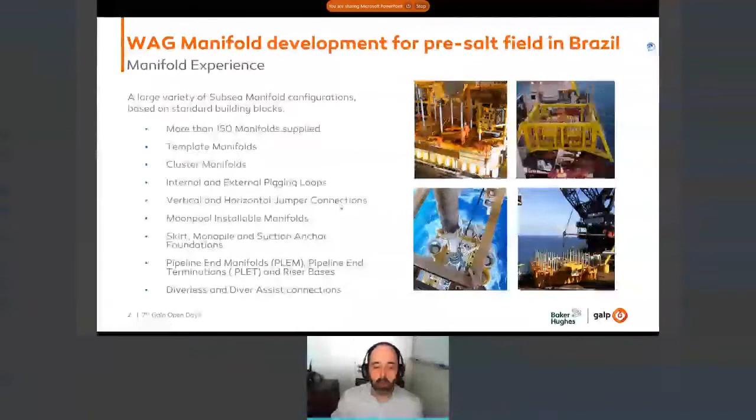We have a large variety of subsea manifold configurations on standard building blocks, more than 150 manifolds supplied. We also have template manifolds, cluster manifolds, internal and external pigging loops, vertical and horizontal jumper connections, moonpool installable manifolds, skirt, monopile and suction anchor foundations, pipeline end manifolds, PLEM, pipeline end terminations with acronym PLET, and riser bases. We also have diverless and diver-assisted connections. Here is a collection of pictures where you can see some of the examples I just mentioned.

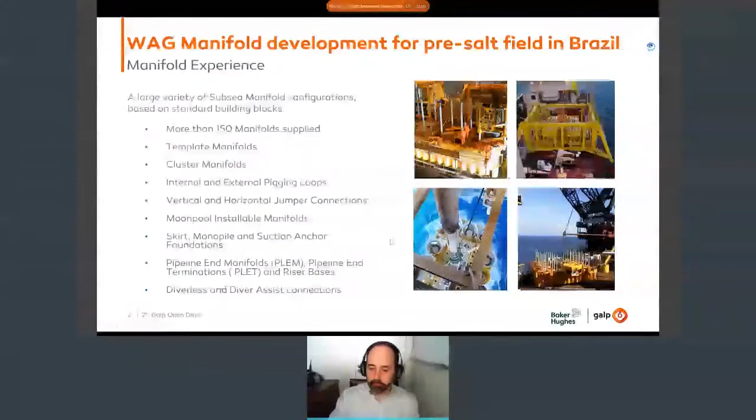So now let's go to the WAG manifold itself - the project overview. In 2014, Baker Hughes started the engineering phases of the WAG manifold for water or gas injection for the pre-salt fields in Brazil. Just a note to clarify: WAG means water alternated gas, so basically we can inject water or gas into the field, the formation.

Here is a 3D model of our manifold. As you can see, we have basically 4 VCMs to connect the manifold to the well, to the Christmas tree, and also 2 VCMs to connect the manifold to the platform. This manifold has a singularity where the design is based on modules, so we have a modularization here. I will explain that in detail after, okay?

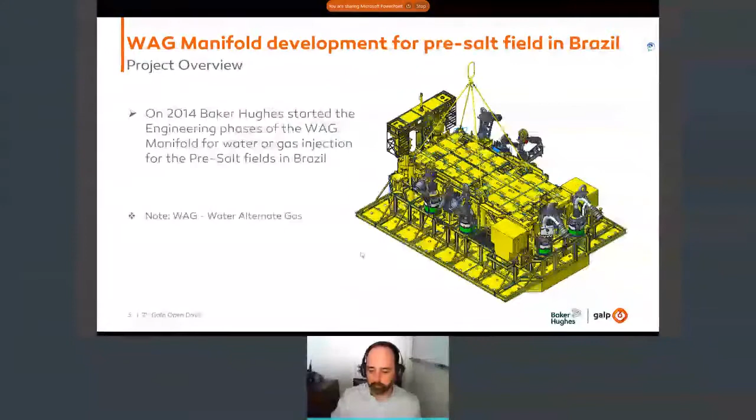Just to give an idea, I will present the input data now. The water depth for this project was 2,500 meters. Working pressure, 10,000 psi. The pipe ID is 4 1/16 inches for the header, 5 1/8 inches for the branch. The material trim is HH, corrosion-resistant alloy. The hydraulic pressure, since this is an ultra water depth project, is 4 to 5,000 psi. The design temperature is from 2 up to 70 Celsius degrees, and the design life is 30 years.

Let me change the pointer to make it clear. Better now, right? So, the design characteristics: the dimension of this manifold is about 16 by 8.5 by 4 meters for transportation - that's something I will also explain after - and 16 by 13 by 7 meters for installation. The weight: average weight is 150 tons for transportation, 215 tons for installation, and 280 tons for operation. Those are approximate dimensions.

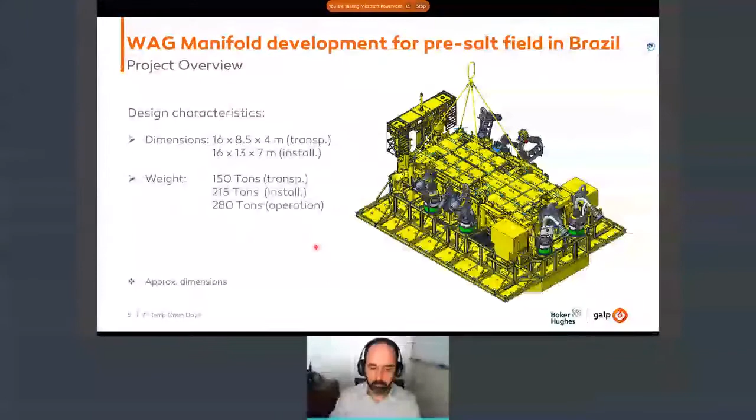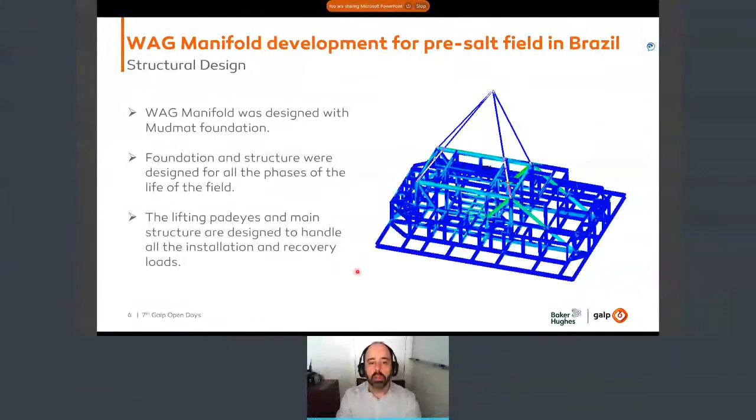Structural design: the WAG manifold was designed with a mud mat foundation. The foundation and structure were designed for all the phases of the life of the field. The lifting padeyes and main structure are designed to handle all the installation and recovery loads. As you can see in this projection, the structure handles installation loads and also recovery. So the installation has a very robust design - it will not handle only the weight of the manifold itself, but also the extra loads when the manifold is installed and craved on the ground, so it can be uninstalled and recovered.

Pipeline design. The pipeline was designed in compliance with ASME B31.8. The pipeline material is X65 with Inconel overlay to comply with trim HH. Use of ASME curves on the branches.

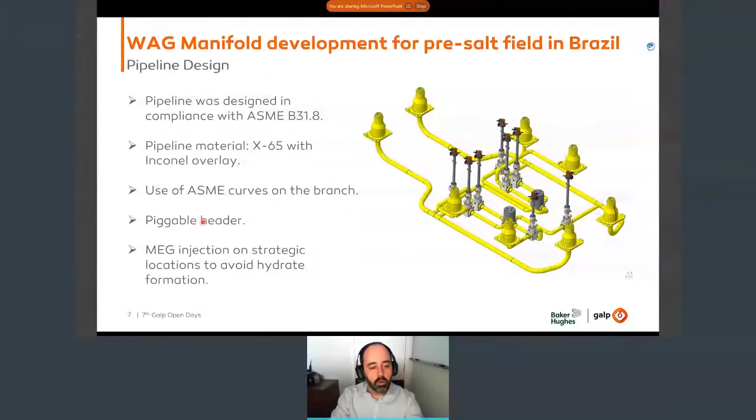It maximizes our speed to delivery. Piggable header and MEG injection on strategic locations to avoid hydrate formation.

Here in this picture, we have a 3D projection of the pipeline. You can see we have a dual header, and this header is piggable. To connect the two headers and make a pipe loop formation, we have a crossover module installed here to connect these two hubs.

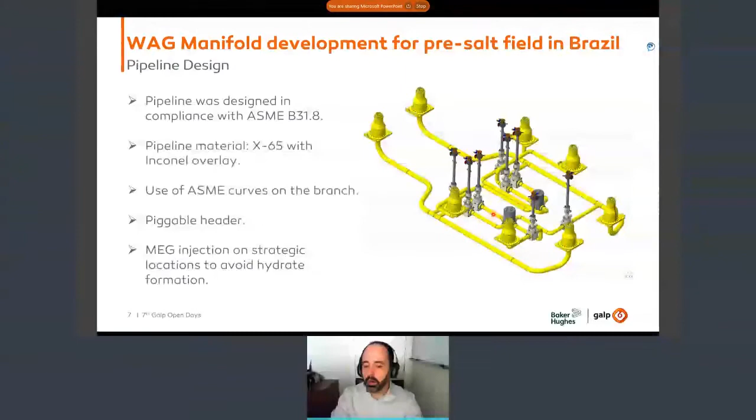I will show this in detail as well. Here you can see these two hubs connect the manifold to the platform, and these four hubs here connect the manifold to the well. We have some manual override valves, and the choke modules are connected by a collet connector.

Modularization. Now let's get into details of these modules. The manifold has basically two choke modules and one crossover module. Let me go into detail.

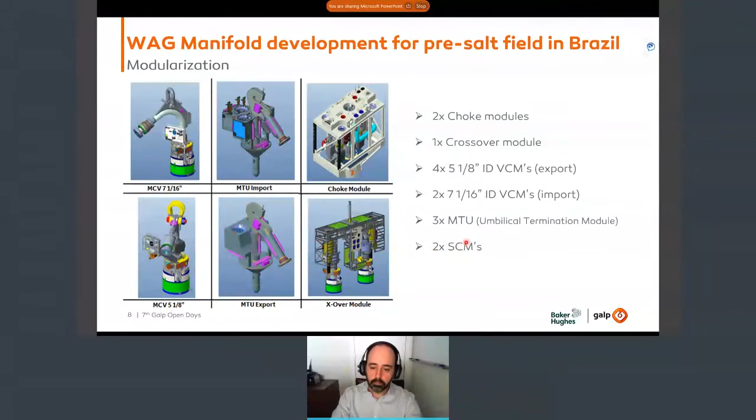Main challenges for engineering. We returned to the manifold product line in Brazil after 10 years, so the team is quite new, and we have a technical challenge to update and adapt the global standard products for the specific requirements for the pre-salt in Brazil.

The creation of the new manifold team in Brazil brought the challenge of a learning curve, and the need to adapt to the company's technologies, culture, and requirements.

We also have a huge challenge here on transportation. The construction yard here in Brazil is far from the coast, and the manifold itself is a large equipment, so we have a road transportation model involved. The roads here in Brazil have this limitation: 4.6 meter height and 9.0 meters width.

So basically, if we go to our installation module of the manifold, the dimensions will be over these limits. What we did here is basically remove the side skirts of the mud mat and also the sub base. So this is the configuration for the manifold for transportation.

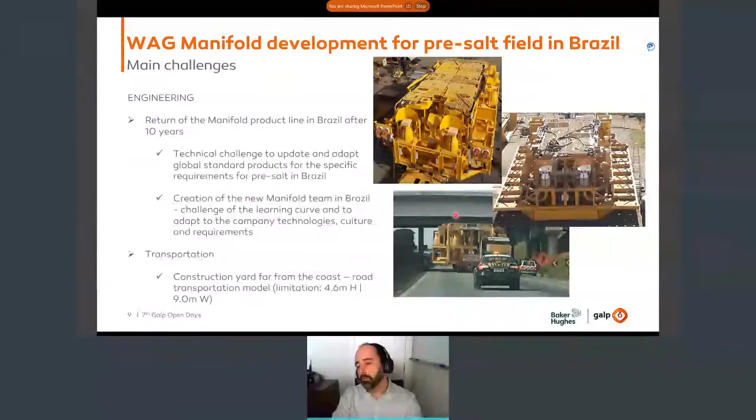Next challenge was regarding project management. During the project execution, we needed to have a construction yard development, and also we have an unprecedented execution model in Brazil. The manifold was completely executed and tested on the construction yard.

This was a successful model where basically we brought the 3D model and just delivered the 3D module to the construction yard, and they were responsible to take this 3D module and elaborate all the executive design to construct the manifold itself. It minimizes the loss and speeds up the process, and we were able to deliver on time.

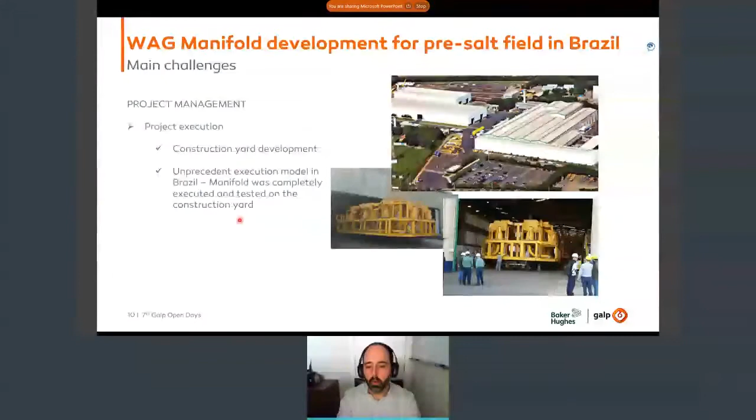So after all, we had our first installation in November 2018. The distance from coast is 200 kilometers, and the water depth for this first installation is 2,000 meters.

Up to now, we have 4 of those WAG manifolds installed. The installation was a success - we didn't have any issues during the installation. Up to now, we have 1 manifold completely commissioned with all the VCMs and all the modules installed, and it was a success.

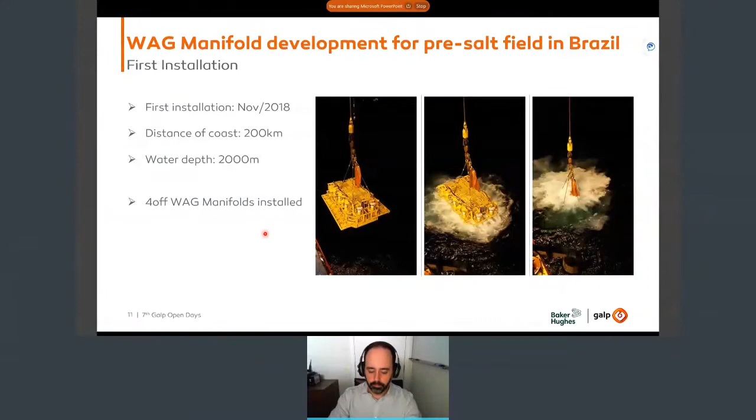And that's it. Let's go for the Q&A.

Yes, great. Well, good morning, good afternoon everyone. I would like to thank Galp for this opportunity. It's really good to get a chance to show you a bit about our program, called the modular compact pump, which is a completely different way of doing subsea boosting in general. This is a program we have in our company targeting the qualification of this pump.

But I would like to start talking about the challenges. When we think about our industry challenges and subsea development, we tend to think about large and complex subsea infrastructures laying on the seabed, and these have a huge demand on the topside facility in terms of equipment and footprint. Subsea boosting has been a response to those challenges, starting from improvements on the process side, but also looking after cost reduction and footprint reduction requirements from the topside facility. But nowadays and in the future, this goes beyond the cost saving requirement.

We are now discussing and talking, and the operators are talking about emissions - how we can reduce emissions and reduce the CO2 footprint of equipment in general, from conception all the way to the end of their operation. And then we use every single opportunity, whether size reduction or weight reduction of equipment, not only to reduce cost, but also to reduce that footprint or emissions in general coming from the conception of this equipment.

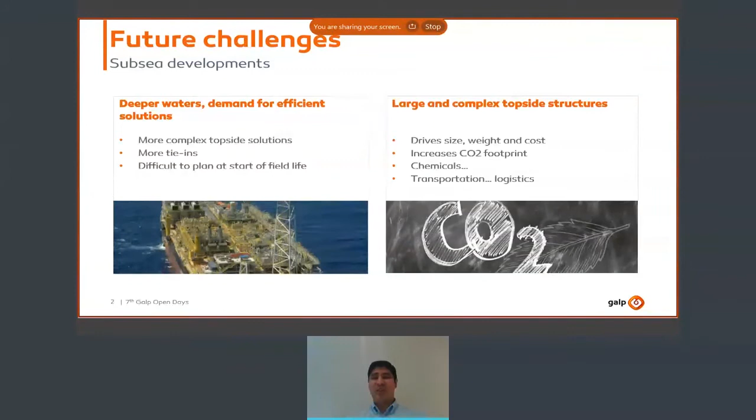But this creates some additional demands. As you have two sides, you need what is called a barrier fluid system, which is basically having fluid inside the motor to avoid process fluid going inside and damaging it. But this barrier fluid system has an additional requirement which goes together with a complex subsea umbilical. This umbilical goes all the way to the top on the platform or FPSO, and it has an additional demand on footprint and weight capacity, hosting the HPU and a sophisticated control module for that.

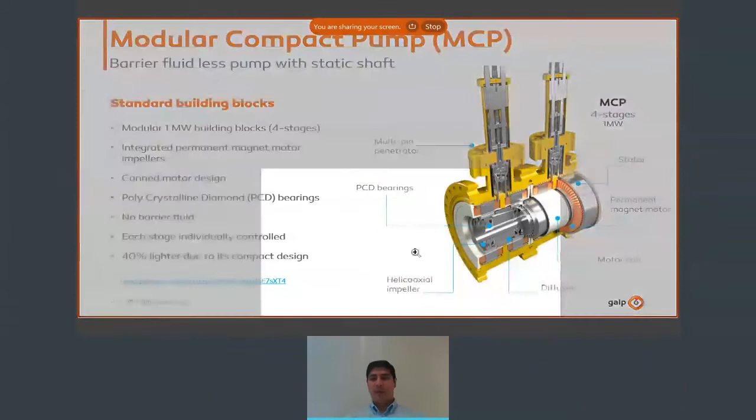The fluid in this configuration comes from the left. As I said, the shaft is not rotating, and the fluid basically wets everything between the shaft and this white barrier, which we call the ceramic can of the motor. So therefore, all the bearings and the impeller, and even the rotor part of the electric motor, is wetted by the process fluid.

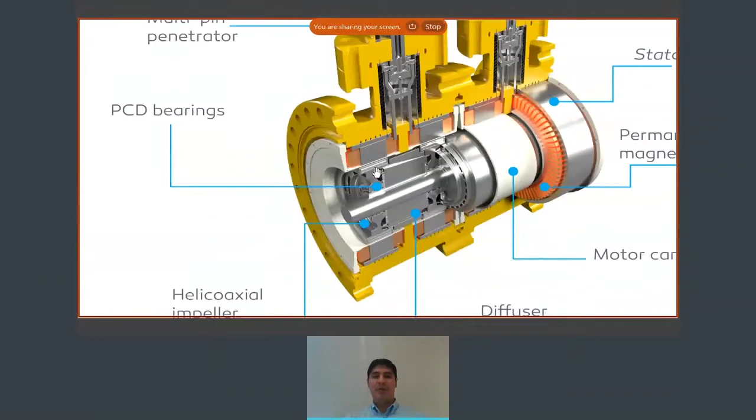This way, you basically avoid the need of a barrier fluid. That process fluid then, after going through the helicoaxial impeller, this configuration here, it's a helicoaxial impeller for multi-phase application, goes into the diffuser and then into the next stage of the pump. On the outer side you have the ceramic can and the stator part of the motor, so then we have an integrated rotor part of the motor with the impeller, and that way we avoid the need of a barrier fluid.

So this has massive advantages. One of them is 40% lighter due to its compact design, because of this integration of impeller with the rotor part of the motor. Also, you have smaller loads on the bearings, as you actually have individually controlled stages, having dedicated motors for each of them. So then you have high flexibility in controlling the RPM of each impeller, which is a big advantage, especially in multi-phase applications. This is the concept and the benefits that the modular compact pump brings.

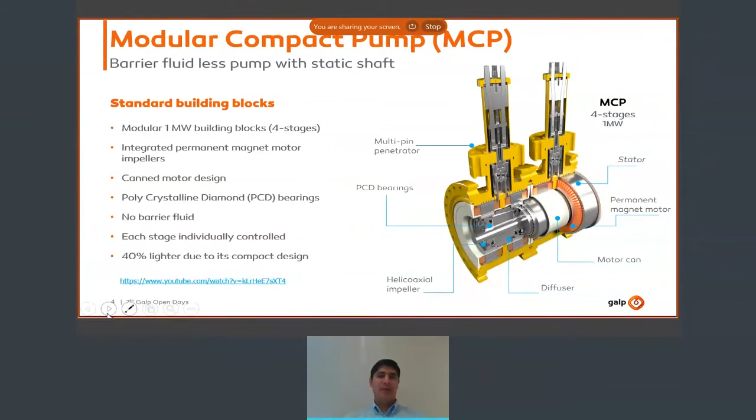So talking about advantages, this concept is fully scalable. We are talking about replicating, or the option to replicate the stages as we wish to meet differential pressure or power requirement. So therefore you have really no limitation on number of stages, which in the case of conventional pump you have due to the rotating shaft and the loads on the shaft.

On top of that, we can adapt, because of this, to changes along the life of the field. So this inherent capacity of adding stages also brings an additional big benefit, which we call inherent redundancy. As you can replicate many stages, and as they are individually controlled, you can actually survive and continue operation of the pump with one failure or a couple of failures. You just compensate the RPM of the other stages, or increase the RPM to compensate for the lack of one stage. So if you compare that with a conventional pump, with a single failure, you will lose completely a conventional pump. While in this case, you can actually have extra redundancy.

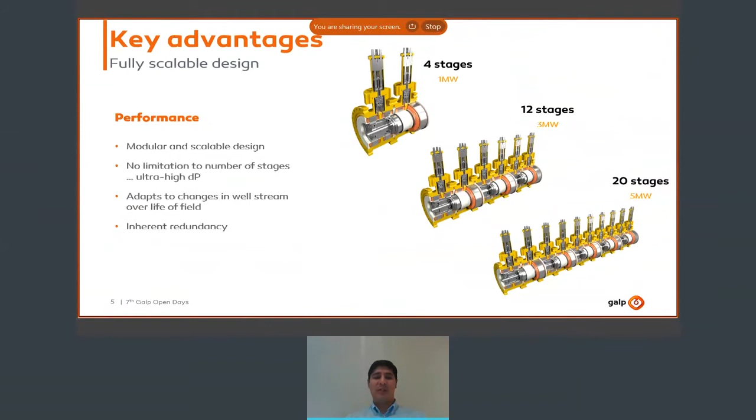An additional benefit of this scalability is that if we're talking about an application where, for example, you have a 3 megawatt pump available and you need 4 megawatt power, you will need to use 2 pumps to meet that capacity demand. While with this concept, you just add a couple of more impellers, and then you meet what you need. So that is also an important cost saving from that perspective.

An additional benefit, as I said, is linked to the elimination of the barrier fluid system. So here on the right side, you see the top side footprint demand from the MCP pump, while for the conventional pump, you will need double that capacity, basically or mainly due to the barrier fluid system. So of course, as you don't have a barrier fluid system, you will also have a simplified umbilical, and that's aligned with all electric systems, which are the new trend in the subsea space.

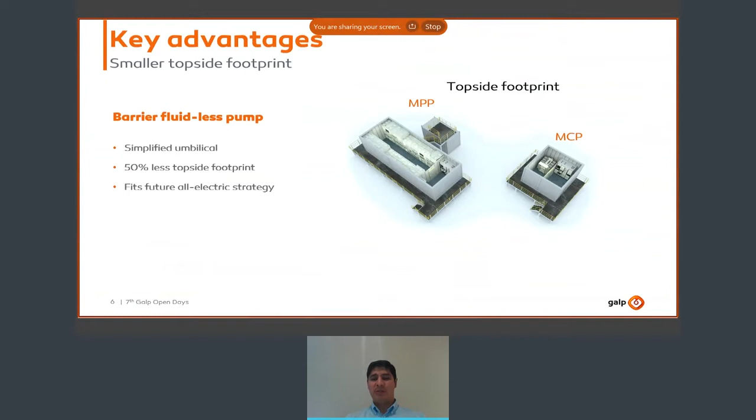So cost reduction, I mean, all these benefits bring cost reduction. An estimate is around 25% lower cost in general. Again, this comes from different sources. One of them is the barrier fluid elimination, which at the same time brings the simplification of the umbilical that I referred. So on the right side, you see the modular compact pump power cable, and on the left side, you see the conventional pump cable that you would need.

And imagine this from the emissions and CO2 footprint perspective. Just thinking about transportation and fabrication of a cable in bigger reels and bigger vessels potentially. So it does bring a big advantage also from the CO2 reduction, emissions reduction perspective.

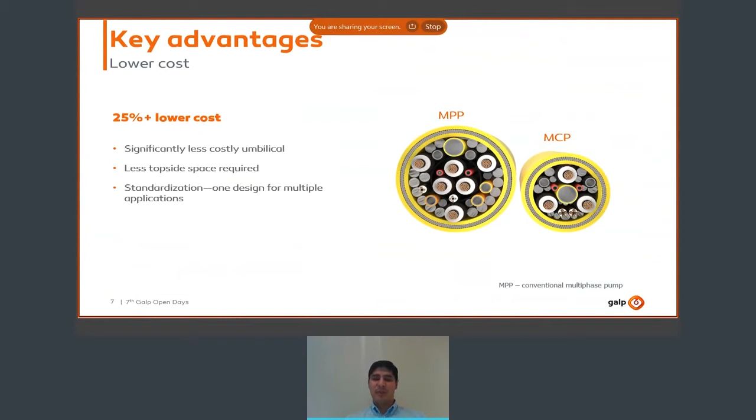So a bit on the system design. A dual boosting station with the MCP would look more or less like in the picture. On the bottom right side, you have the power cable, which feeds first a transformer. This transformer feeds power to the VSDs through wet mate connectors, and at the same time, these VSDs control and feed power to individual motors on the modular compact pump, which is in white here. And of course, this comes into modules, and you have piping manifold, which is conventional in this kind of stations.

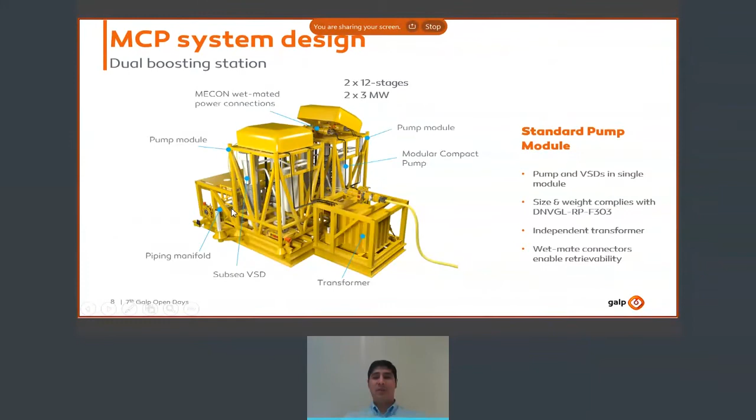So I told you a bit on the technology and the benefits it brings, and this has been a development that's been on for a few years now, but has focused so far on the multi-phase version. So thinking about the multi-phase version, we are talking about helicoaxial impellers and not centrifugal impellers. And on the path we have been going through, it is in 3 phases.

Phase 1 was back in 2016-17 and it's been completed. So at that time we built and tested a prototype, and this was in our facility in Bari, and we tested this pump up to 5,000 RPM and 80% gas volume fraction. So this proved to be a successful testing, where among other things we actually verified that the polycrystalline diamond bearings can operate with this process fluid around for cooling purposes. So an additional important learning was that we can really operate this pump with a failed stage by compensating or increasing the RPM of the other stages. So that's back to the inherent redundancy that I mentioned to you.

Then phase 2, which has also been completed, was about critical components and sub-assembly testing. So here we did process fluid lubricated bearings testing. We actually went beyond 6,000 hours of testing of these bearings, which was a good learning and demonstrated the feasibility of this concept. So we also designed the motor and power electronics, and we designed a pilot for the qualification in the current phase, which is phase 3.

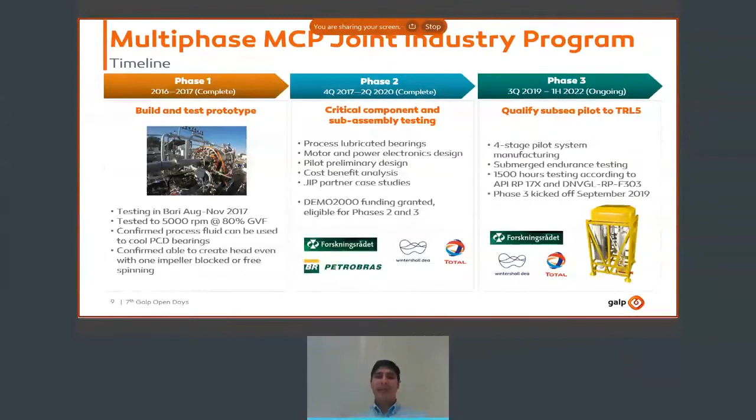That's on the multi-phase pump program, and we do see this technology as a platform for other applications. The next step would be to have this centrifugal pump, or what we are developing as a helicoaxial pump, for a single phase application.

That basically targets possibly two main applications: water injection to increase oil recovery, and CO2 reinjection. In the case of CO2 reinjection, as this is a pump, it will be for CO2 in supercritical conditions, which is a more liquid-like type of fluid. But what we can make use of is the multi-phase program and the qualification program we're completing.

So it's actually quite a bit. We will be using, for a single phase application, quite a few components, including the multi-pin penetrator. We will be using the motor part, the stator, permanent magnet motors, the motor can. So all that will be qualified and available for a single phase application.

And also the bearings. So the bearings, due to the different geometry of the centrifugal impeller, will need to be slightly different in size and arrangement. Also the diffusers will need to change, as the diffusers are in this case applicable for helicoaxial and multi-phase applications.

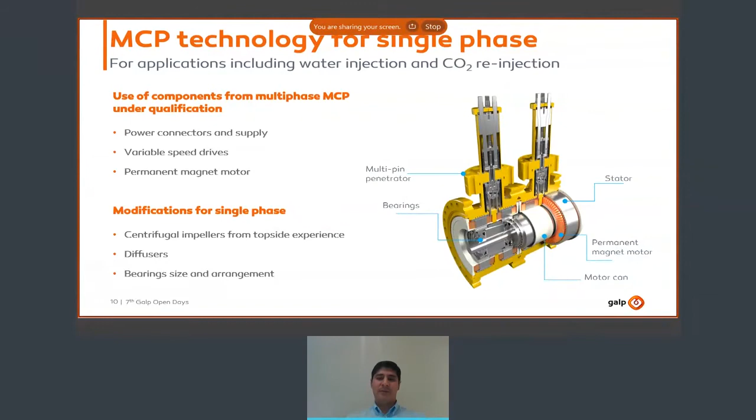But so then basically I'm telling you we're missing the hydraulic part on the design of the centrifugal impellers, and that's actually something we have done quite a bit, specifically in topside solutions. So we have provided pumps with differential pressures of up to 540 bars, for example, for CO2 applications. So we really know that application well, with proprietary design and in-house expertise.

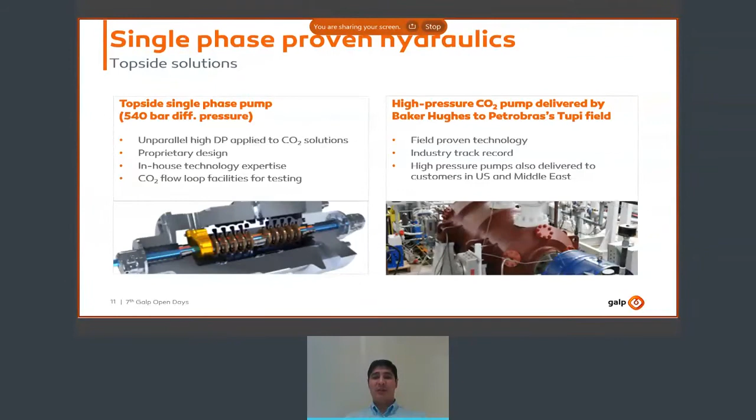And this type of pumps, again with pretty high DPs, are being delivered, like for fields like Tupi with Petrobras, and others in the Middle East and the US for both CO2 and seawater reinjection. So implementing these hydraulics into the previous concept will basically fill in the gaps.

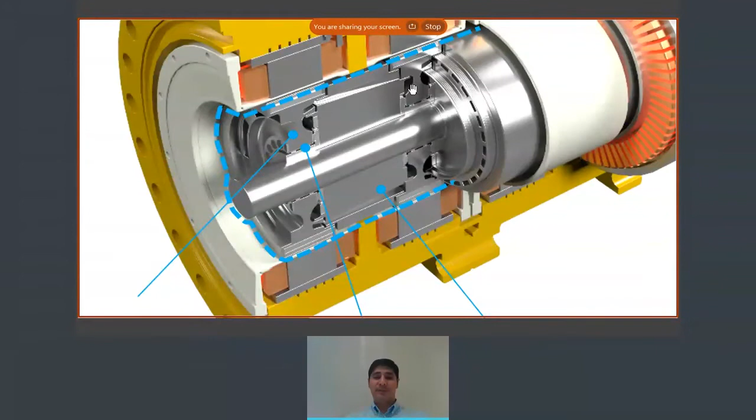You can see here the thrust bearings, the synthetic diamond bearings that will need to change a bit due to the new geometry of the centrifugal impeller, also the diffuser as an example, but the rest will continue being the same. So that brings a lot of simplicity or a lot of lower complexity for this potential new development.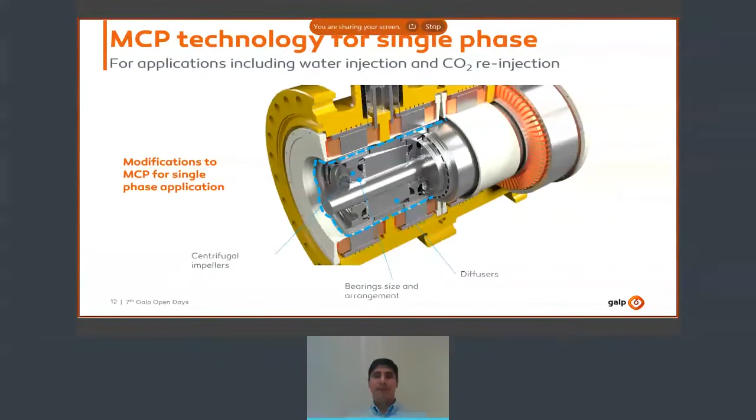So then, thinking about the MCP as a technology platform, we have a wide range of solutions and applications that can target different scenarios, and again, all of them target to have cost reduction, but above all now this CO2 footprint reduction of the equipment during its life cycle.

So again, multi-phase application requires helicoaxial impellers, as we went through in details. For the CO2 application in supercritical conditions, we can tailor with centrifugal impellers, and we can couple that with subsea separation, which is an example here on our Troll pilot.

We can also couple that technology with water injection using, again, centrifugal impellers, and counting on our program on subsea water treatment. So we can inject water too for increased oil recovery applications. And also centrifugal impellers for low gas volume fraction applications, also that can be coupled with subsea separation. So this gives a range of opportunities to improve or to offer solutions in different applications.

So just to close the presentation, some highlights on the modular compact pump. We believe this solution is really targeting the new requirements on reducing emissions and also CO2, from both perspectives: simplifying subsea systems and equipment, and also, for example, in an eventual application of reinjection of CO2, which has a very high differential pressure demand.

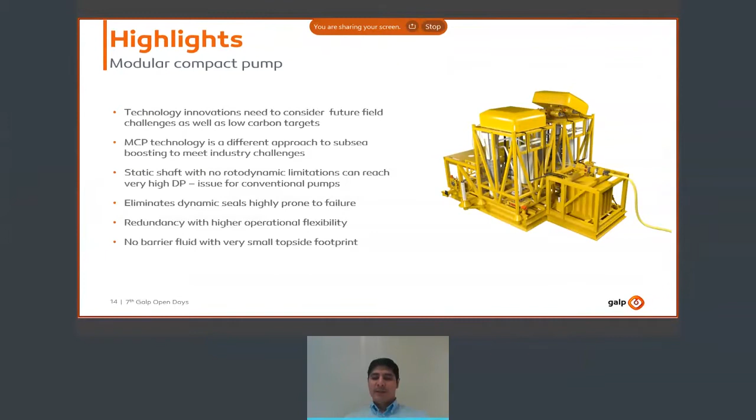I will pass you now some of the questions that have reached us. The first one is, considering the low price environment we are now in, can you elaborate a little bit more on the strategy to qualify this new technology under this environment?

Yes, despite the challenges, we are progressing well with this technology qualification. It's again for the multi-phase application, and we have interesting discussions with a customer, an operator, well actually a few of them, on this CO2 application. We do see big potential for this pump and its benefit to meet the targets, the main challenge being probably the high differential pressure of that specific application.

Okay, thank you for your answer. We have a second question, related to the motor voltage. Where do you see the benefit in increasing the motor voltage, or are there any savings on this strategy? So the motor voltage decision has been made on the basis that we see low voltage being more reliable than high voltage.

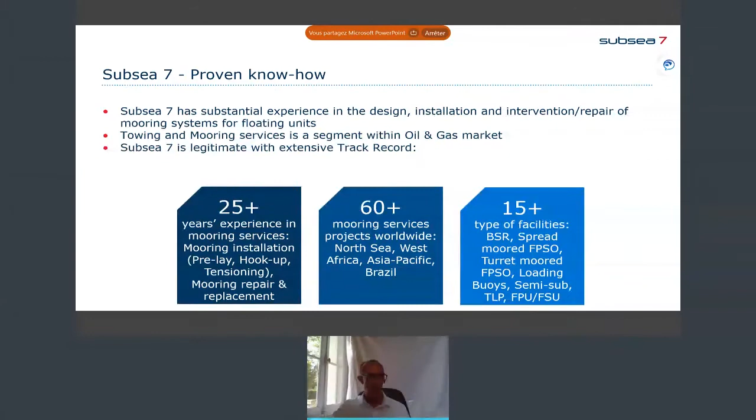Here is a brief overview of our mooring service track record. There are about 17 different types of mooring systems that have been installed, from the buoy supported riser, which is a kind of big 2,000-ton floater supporting 22 steel catenary risers offshore Brazil. The floater itself is about 2,000 tons in weight, so it's a massive structure which is actually submerged at 200 meters below surface and moored with 4 tendons, including 4 extra tendons for redundancy. And we've been installing also FPSOs and TLPs and various other structures.

I'll give a few examples of projects that we have executed. This one is called Blind Faith in the Gulf of Mexico. The client was Chevron. The water depth here is 2,000 meters, and it's a semi-taut mooring system installed with suction piles, suction anchor piles in this water depth. Generally, that's the type of pile that we are using to secure the mooring line.

It's a mixture of chain, bottom chain, and polyester segment running up to the hull. The contract for us includes also, I'm talking about mooring, but it does include the wet tow from the shore to the offshore site, including the station keeping and the mooring line hookup. In addition, for this one, we were also contracted for the hull dry transport from the fabrication site to the Gulf of Mexico.

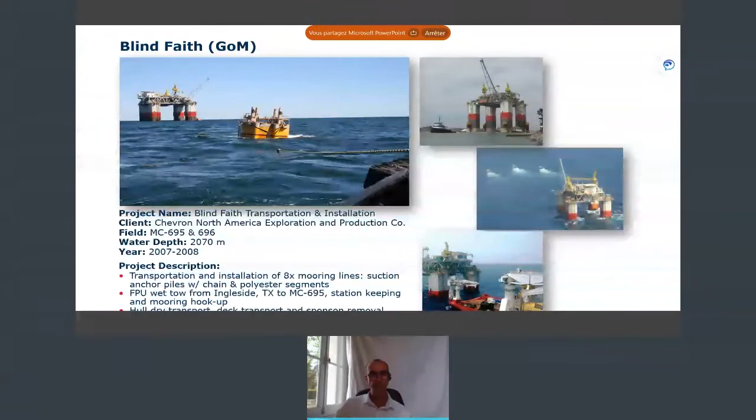This project was installed in, as I said, 2008, about 10 years ago. It includes 12 mooring lines with chain, bottom chain and polyester cable segment. It did include the wet tow from the shore to the offshore site and the mooring line hookup.

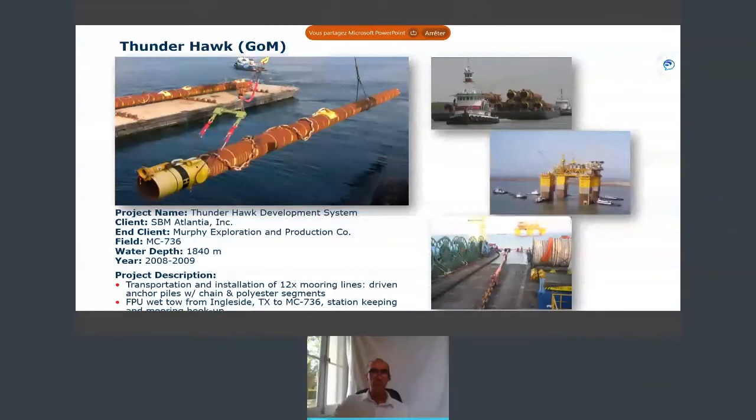This project is actually a different type of floater, the turret FPSO. It's in Ghana, West Africa. And for that, it's a transport and installation of 9 mooring lines, suction anchor piles with also chain and polyester segment. It did include the final tow of the FPSO to location, the station keeping, of course, and the final connection of the mooring line to the FPSO.

As I said, it was executed including 4 geographical locations. It is quite often that in Subsea 7 we use not only our Houston main office, but we share the work between the various offices, Lisbon being one of them recently, for example, but we do share the work between Houston and Paris or Houston and London, depending on the client and other parts.

This FPSO was installed using vessels of opportunity, which are named here, but which are not part of the Subsea 7 fleet. Normand Installer is a well-known vessel from SBM, which is really specialized in installation of the mooring anchors. Here you can see the picture of the suction anchors, which are actually deployed directly from the deck of the Normand Installer. And the Olympic was used to deploy the chain and the mooring wire.

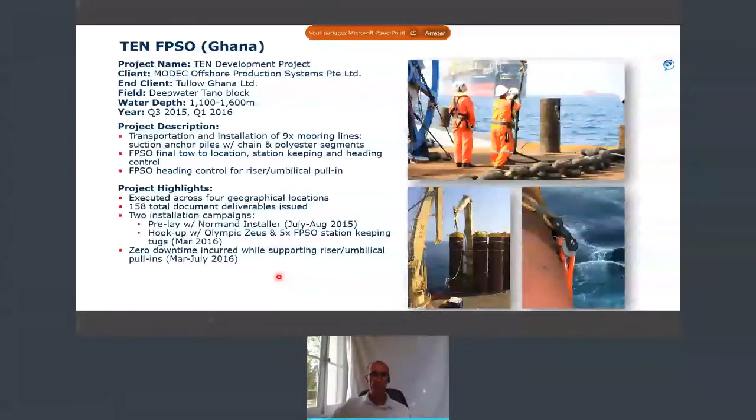The next slide shows the more recent operation that we have performed on the Jubilee FPSO, which is also in Ghana, and which shows a bit of our success in having repeating orders from the client. We have here the Tullow, the client was Tullow. On this one, due to the fatal breakdown of the FPSO turret, the client has decided to actually install a spread moor system, which necessitated the installation of additional spread moored mooring lines.

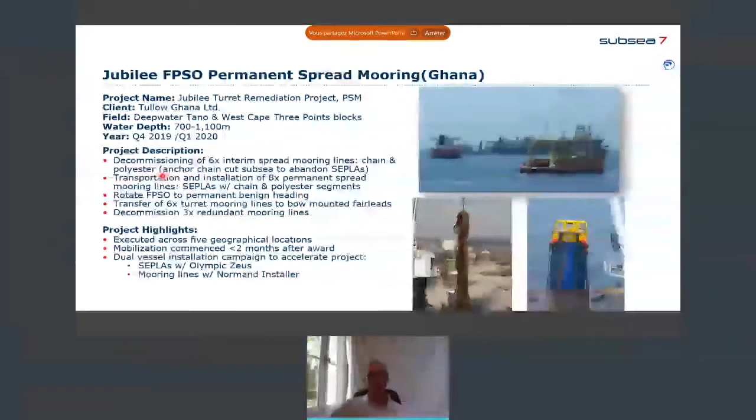This time the anchors were what we call SEPLA, which is suction embedded plate anchors. You see here the suction caisson, which is used to embed the plate anchor at depth before the installation of the mooring line.

On that one, we also used for the installation of SEPLA the Olympic Zeus, which is not shown on the picture here. But here you can see the Normand Installer, which has been used to install the mooring lines. So that was quite a project, executed across 5 geographical locations.

On that one, we had engineers from Lisbon dedicated and following the work, together with engineers located in Accra, Ghana, to support the local content part. These engineers were actually sent for some time to our Houston office to support.

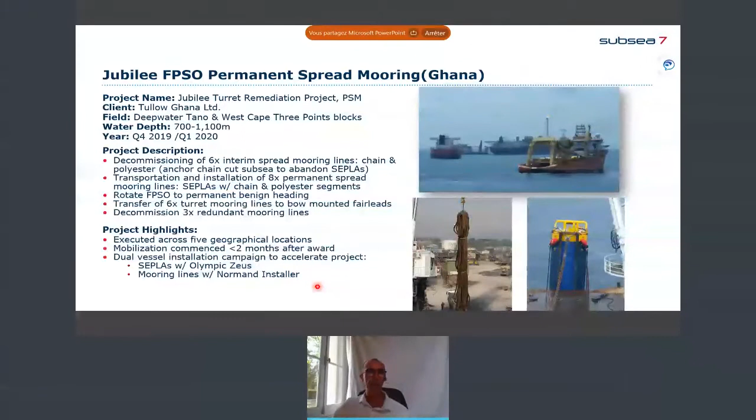This information, procedures development and offshore operation, was a brief overview of the type of system we have installed in the past, showing our wide experience. I will go into more detail on the installation of an oil offloading buoy in Africa, in West Africa, on the same field we just talked about, which has got this FPSO where the turret has been permanently damaged.

The client decided to install an offloading system composed of 2 22-inch rigid pipeline lines, connected to an offloading buoy here, which is an APL type, with a semi-taut mooring system shown here along these lines, with the repartition of the mooring lines shown on this slide.

It's a 7 mooring line system with 4, 2x2 on the wind. The wind and waves mainly come from this side, and then a 1x3 on this side, which is, I would say, more benign weather.

Let me go back to my text here to see if I'm not missing anything.

The mooring line composition here is a ground chain of about 150 to 180 meters, a mooring wire segment which is a spiral strand sheathed wire of about 700 to 900 meters long, depending if it's short line or long line. Then two sections of connecting top chain, one 15 meter section connected to the wire, and a 30 meter section pre-installed and connected to the buoy.

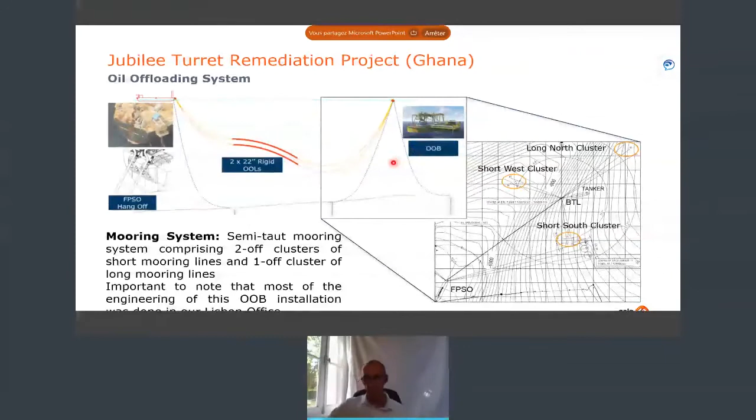How did it work here? First, we did the installation of the anchor piles, deployed this time with our vessel 7 Borealis, which is probably an overkill to install that, but we had the opportunity the vessel was here on location to install the offloading lines, and this was installed by this barge to install the 7 piles we needed for this particular mooring system.

This is shown from the main crane of Borealis deploying with the auxiliary hook direct from a transport barge. The anchors are about 20 meters in height, 4.5 to 5 meters in diameter, and about 100 to 120 tons in weight. Deployed in one shot at location, and then sucked with the ROV directly onto location.

Overall installation - this mooring line we can probably see somewhere here. You see it, there's a connecting padeye here, and then this chain, which we call the connecting chain, is secured on top of the anchor, which you can see on that side, with an H-link, which is then connected by an ROV to what is going to be the pre-installed mooring line.

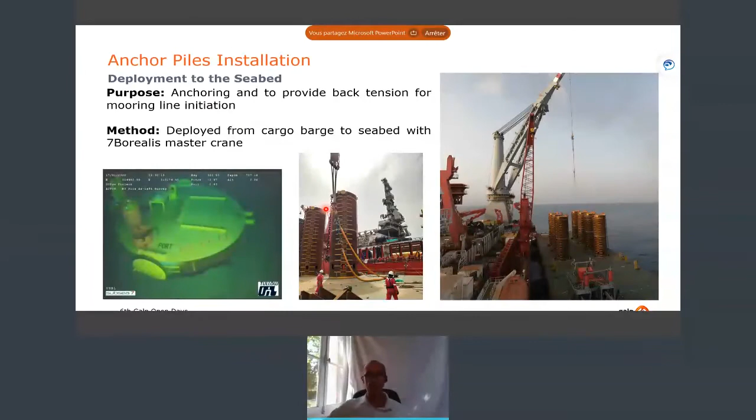Then the second operation, which is a bit concomitant to the installation of the pre-installed mooring line, is the towing of the buoy, which is performed. So the buoy was fabricated in...

Lithuania, and transported by heavy lift cargo down to Ghana, where it was offloaded in Takoradi Harbor, which is the closest port to the offshore field.

And then it was towed with a couple of tugs, lead tug and trailing tug, to location. Nothing particular here, except that we needed to do a proper ballasting, so the buoy was not rotating in all directions, and the towing speed here was achieved around 3 knots.

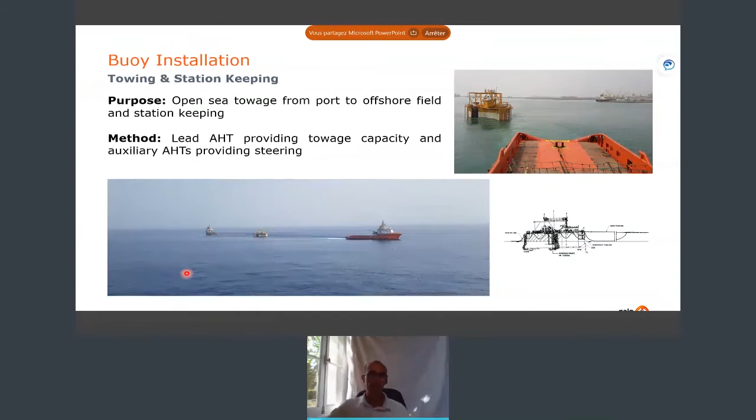So the way we then, after once the hawser and while this buoy was being towed, we pre-installed the mooring lines with the Skandi Skansen, which is not one vessel from our fleet, but a very powerful anchor handling tug equipped with a suitable 250-ton crane.

So what we see in this picture is we deployed the first 180 meter chain, which prior to deployment was cut with a few links. We cut, I think, to the maximum, about 10 meters. But on some chain we cut only a couple of meters, depending on where we install the mooring piles. So the chain was deployed first, and then immediately connected to the spiral strand wire.

Which was paid out from the working winch from the installation vessel. And you can see here the H-link, which is ROV operable, which is going to be connected to this particular link here, which has been put in standby when we deploy the pile.

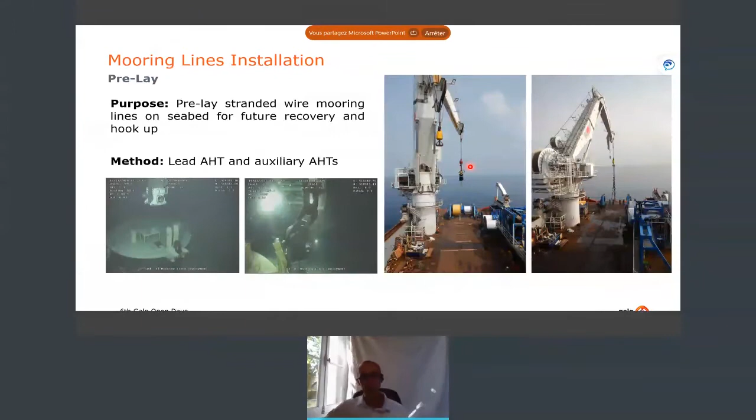Once the mooring link, the H-link, is secure, we lift up a bit this chain to take it off this standby location, and then start deploying the mooring line towards the buoy. So that was done using the Skansen as I just described. And then the mooring line was temporarily laid on seabed while we were installing the next mooring line.

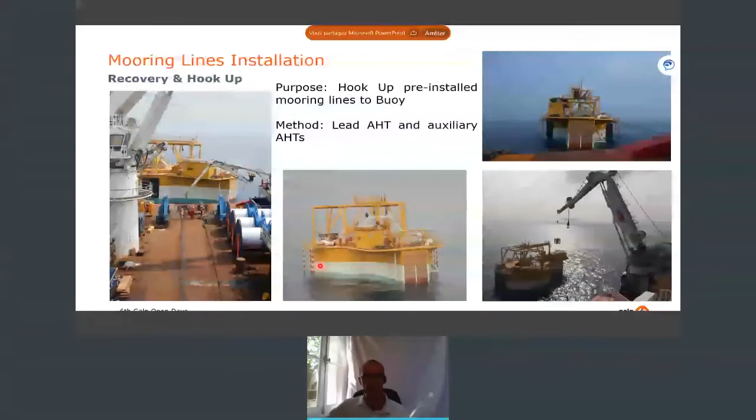The second thing we needed to do was, once the buoy was on location, we actually removed all the 30-meter long chains which were secured alongside the buoy, which we don't see here on this picture, but you can imagine on each cluster we had three, or two and two, pieces of chain which were secured along the buoy.

And then we recovered - the buoy was hauled in in position by the tugs, and then we connected the mooring line, which we recovered from seabed, to this second section of the buoy.

The tricky bit here, as I said, is that there is no possibility to adjust. And as you can imagine, the first part to connect, we connected first one short line, another short line, and then we went to connect the next long line to secure the buoy in position. But once we connected the second short line and the third short line, at that stage, when there is a buoy only on 3 mooring lines, it was quite easy to move it around to be able to connect the two sections of chain together, which this operation is done on this deck here.

But when we come to the final mooring line connection, then the tension, the buoy station keeping is stronger, and it did require the help of a couple of tugs to pull the buoy towards the Skandi Skansen, which was backing off once he had recovered the line, backing off closer to the buoy to be able to connect. We show here on that figure...

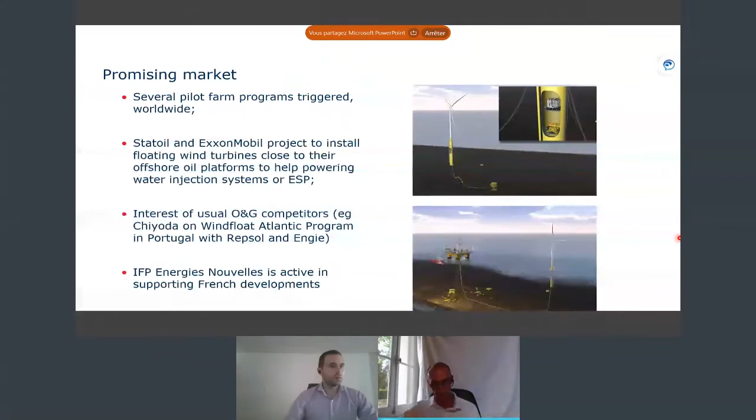As we see, floating wind is definitely picking up in some ways. It's not going as fast as fixed wind. There are quite a few projects around the world, and we hope that this is going to be even more in the future, so that we can benefit from the technology that we have deployed today and continue with it for the benefit of the energy industry.

And that's it for my presentation. I will open the floor for questions and stop sharing my screen.

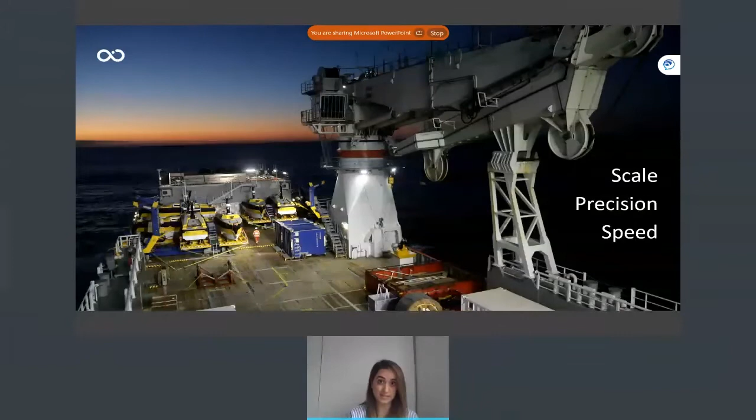To do that, we need the best team possible, and we are full of experts. This is actually the first company to deploy multiple AUVs and USVs at this scale, so we need a very good team to achieve these operations. Our team operates this advanced technology from the start, from mission planning to data delivery.

For safe, efficient operations, we need to develop comprehensive sustainability and safety procedures. For us, the most important thing is our team, our customers, their safety, our contractors, all the people working with us in our projects. Safety is very, very important for us. That's why we have procedures, a stop the job policy, and trainings on that.

Sustainability is the heart of what we do. Our aim is to do minimum impact on the environment by what we do. Our host vessel uses materially less fuel, so we have far less impact on the environment. Using multi-AUVs, we finish projects in much quicker time, using much faster operations and lesser carbon dioxide emissions.

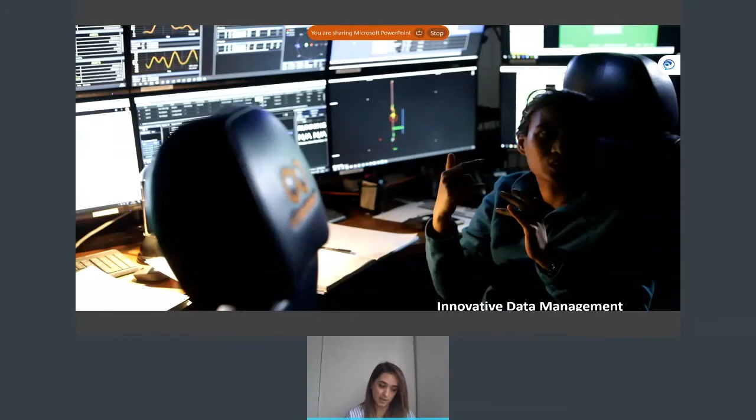So thinking about all these, we actually did a lot in a very short time. We started with 1 office and 6 AUVs around 2015. You might have heard about us due to the Malaysian Airlines search, MH370, which I will mention in the case studies.

Our first commercial survey project was with Woodside Energy. We also worked together with Kraken, using their batteries to get more out of our AUVs, giving us much faster, higher technology AUVs and batteries. I'll mention more in a bit.

End of 2018, we located the missing Argentinian submarine, Ara San Juan. This is a very important project for us. There were 27 ships, 11 aircraft, and 7 countries looking for this missing Argentinian submarine, and we found it in a very complex bathymetry area, around 907 meters water depth.

We had 60 crew members, 4 family members from the Argentinian crew, and 3 officers from the Argentinian Navy observing while we were doing the search operation. We found their resting place, and this is still a very important project for us.

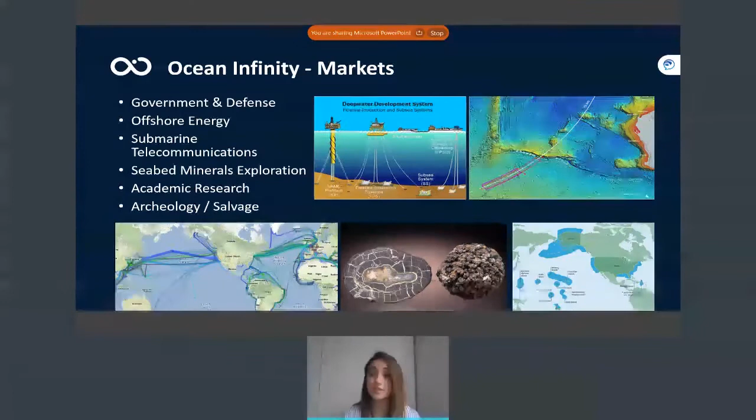The markets we are interested in: offshore energy is a very big part of our job, submarine telecommunications, minerals, government defense, academic researchers, and salvage and wreck archaeology markets. But what are the advantages of multi-AUV? Why are we using it, and why am I talking about this?

Because we reduce offshore manning by 75% compared to equivalent production using conventional methods. We have shorter project times, and sustainability increases because we use less fuel, so it's very environmentally friendly, and we can do simultaneous operations. So while we run our AUVs, we can have ROV inspections and also geotechnical investigations at the same time.

Some of our competitors might have just one AUV, and if something goes wrong with it, it might delay the project, or even cancel or postpone it. In our case, because we have multiple AUVs, we always have a spare one on our vessels. If there's a problem, we can bring the spare one into the water, take the problematic one out, and fix it because we have a great team. We can maintain and fix our AUVs while other ones keep running the job, so there's no downtime.

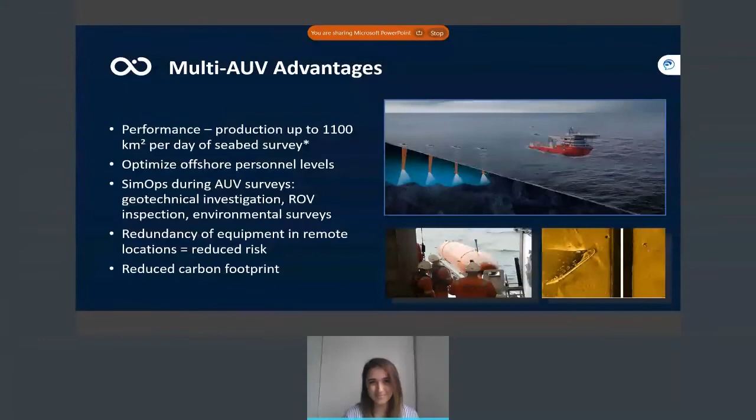So these are just a few advantages of using multi-AUVs. Moving on to technology and equipment, this is how it looks. This is the AUV and the sensors, but the most important thing I want to talk about is that we are working together with Kraken and now have more advanced batteries.

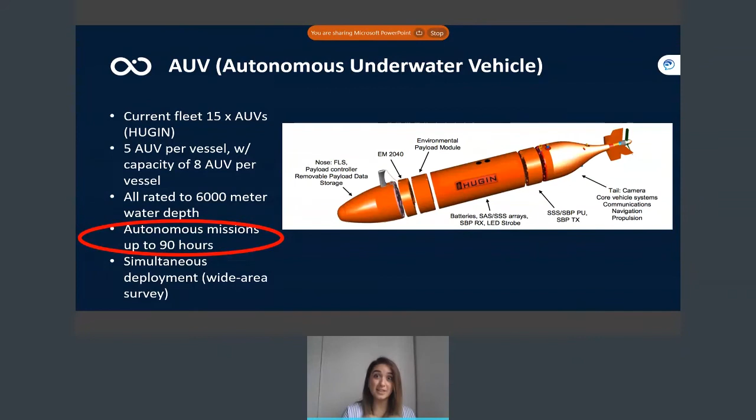We used to run AUVs for launch and recovery up to 60 hours per operation. But with these new batteries, we can run AUVs in one go, including launch and recovery, up to 90 hours. That really affects our project time and makes them shorter.

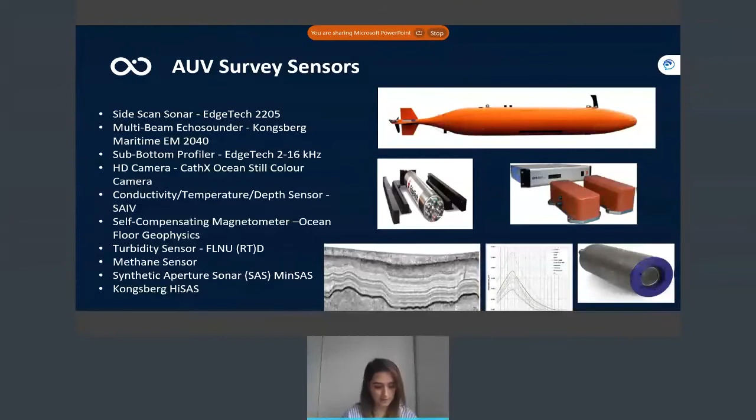These are some of the sensors we can use, and depending on the project needs and whatever we would like to do, we can change the sensors and make customizations with them.

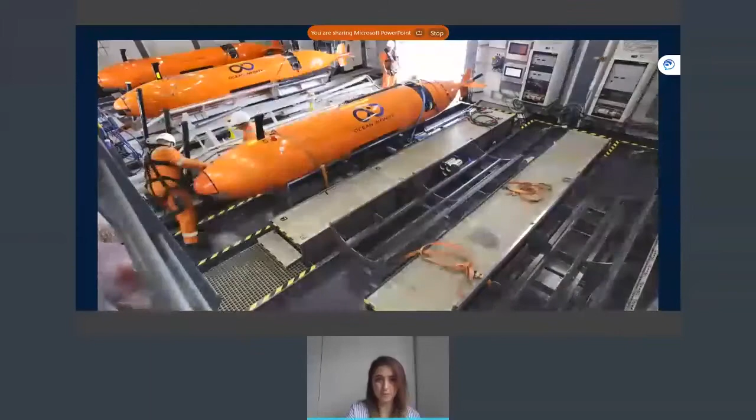I don't know if you can see the video. It's a very short time-lapse video of our AUV operation. This is our hangar from one of the vessels. They're all very similar, they can hold up to 8 AUVs, and you can see how they launch one after the other. This is a good example because if there's any limited weather downtime, we can put them into a wait pattern and continue after that.

Saying that, with our recent NPD project, Norwegian Petroleum Directorate project, we didn't have any weather standby time.

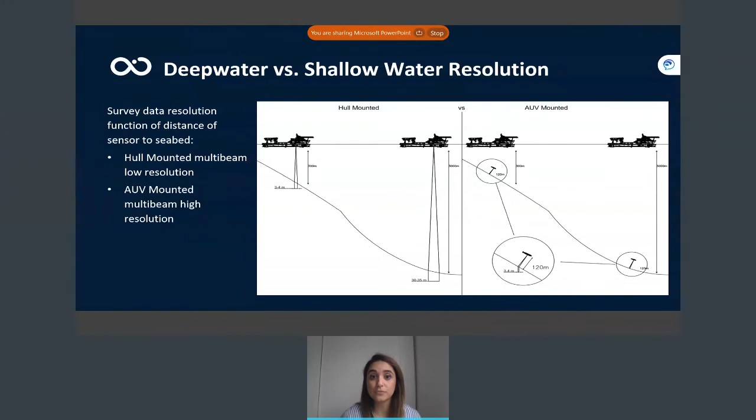The picture shows you how the vessels have hull mounted sensors underneath. We have 2 of them, and the third one will be planned for this year to put under our third vessel. We use them mostly for seep hunting surveys, mining slope delineation, cable route surveys, and so on.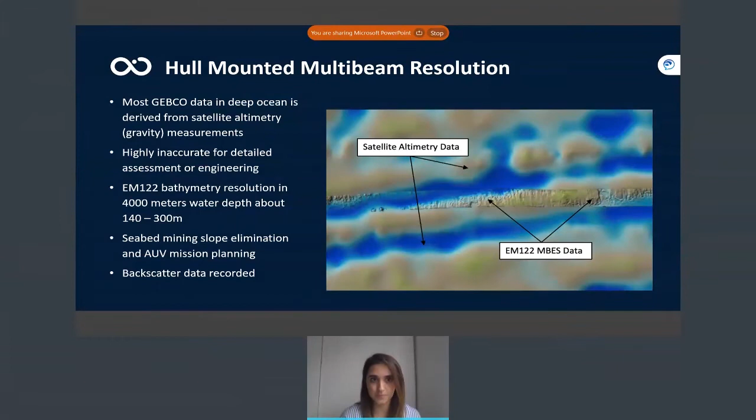Our USVs are operating up to sea state 5, and they're quite fast. But I will mention the new upcoming business unit related to that at the end of the presentation. I hope you're gonna like it.

The ROVs, we mentioned the world-class ROVs we have. We mostly use them also for live stream from ROVs to the control room, so we can see what's happening at the same time. We can see the seabed very clearly and what's on it, and analyze it very quickly with our ROVs.

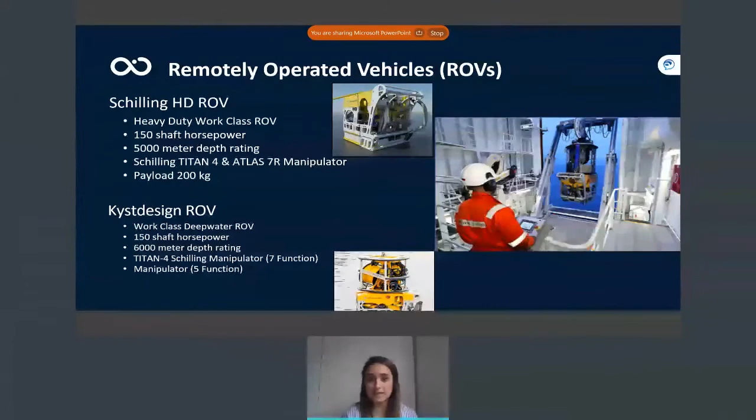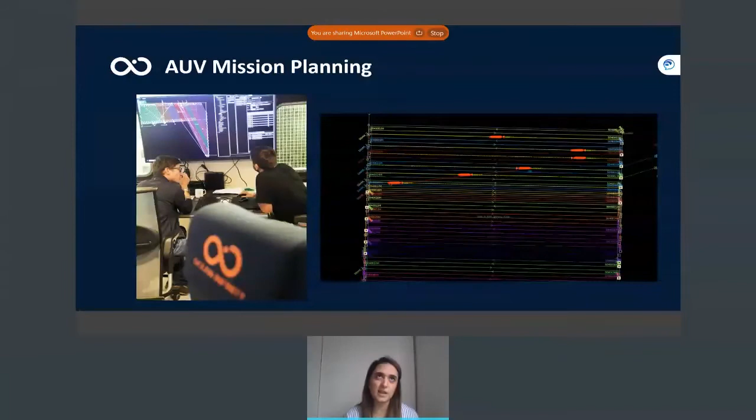I think one of the most important things in our mission is the AUV part of it, because using multiple AUVs at the same time is very, very important. So these AUVs, we need to plan properly, and of course there are some challenges like simultaneous operations.

We get the solution from our software called Infinity View. It shows us the dynamic inputs and how the AUVs are going, how they are moving, and also it can show us if there's any hazards. The AUV is very clever to avoid hazards, but mission planning is very important, and this software is specially designed for Ocean Infinity.

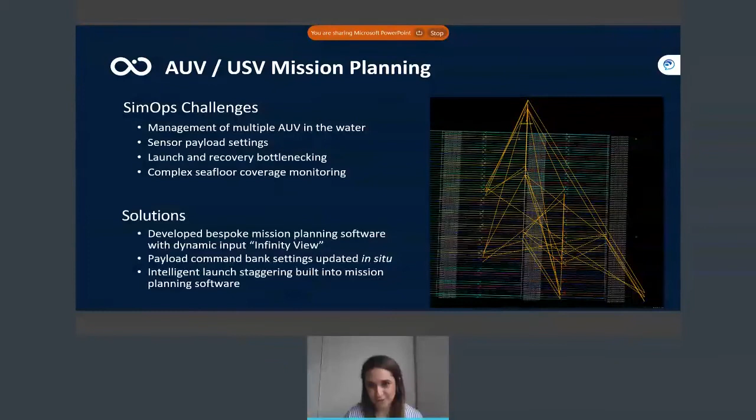And of course the case studies. We start with Woodside. It was a time-sensitive project, needed to be really quick, and it was wintertime in Australia. Water depth from 100 meters to 1,500 meters, a 280-kilometer pipeline route from field to shelf break.

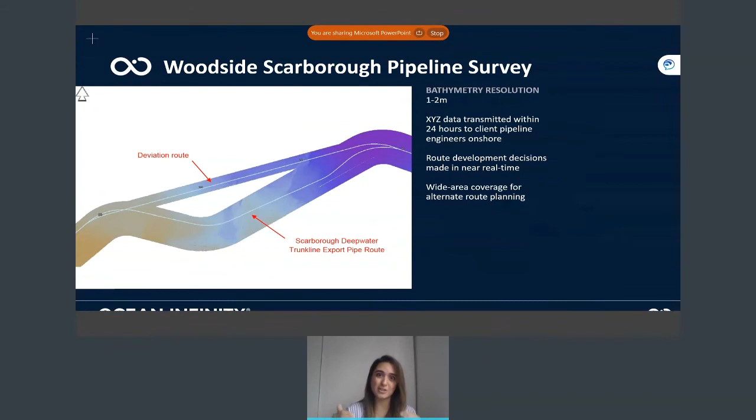We used AUVs, multiple AUVs, and ROVs at the same time here as well. The good part with this was the client was really happy because we were showing them how it's going, and they could make adjustments while we were doing it. So the route development decision was made during the project, making more efficient routes while working on it.

Comparing the results is fascinating because in some parts we used up to six AUVs at the same time. If this project had been done by the traditional method, it would take 70 days for a traditional 1 AUV operation, compared to our project finishing in 20 operational days. So the efficiency is almost 4 to 1.

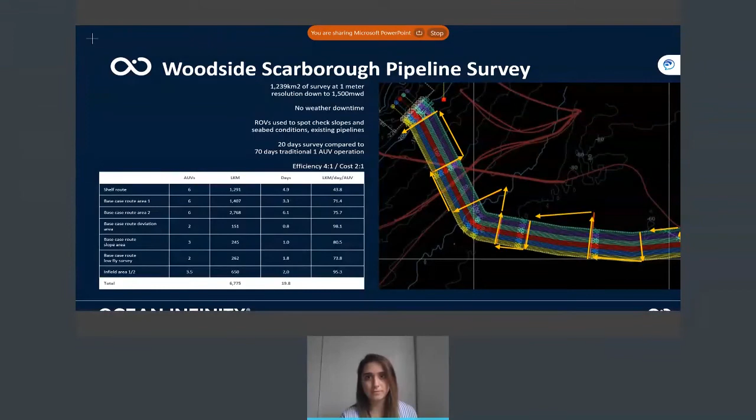And Total Angola - we finished this project recently. It was a 28 day project from Nordic Frontier, and we conducted ultra high resolution seismic survey and seabed soil sampling in blocks too. The most important part of this project is that we gathered geophysical, geotechnical, and seismic data at the same time.

This is very important because this is the first time geophysical, geotechnical, and seismic data was acquired at the same time from one operational vessel. Because of that, and also the operational performance and HSE performance, we got certification for 28 perfect days from the Total Angola team, which we are super proud of.

And the search for Malaysian Airlines 370. This search started around January 2018 with the Malaysian government, and it's one of the most difficult places in the world because the southern Indian Ocean is one of the most remote locations. We covered the area much quicker than the rest of the companies - around 125,000 square kilometers in 4.5 months, with one vessel using 8 AUVs.

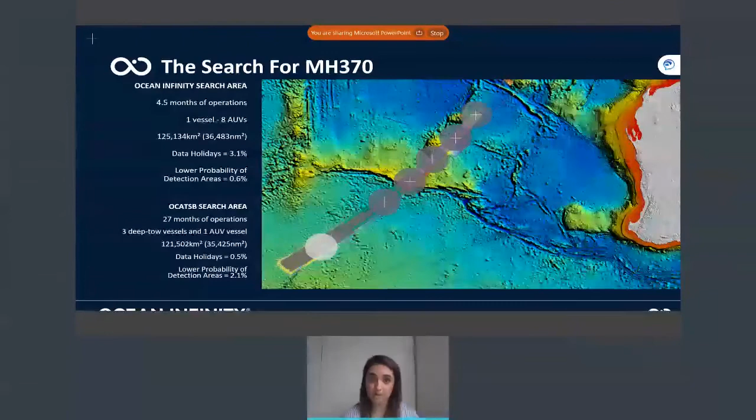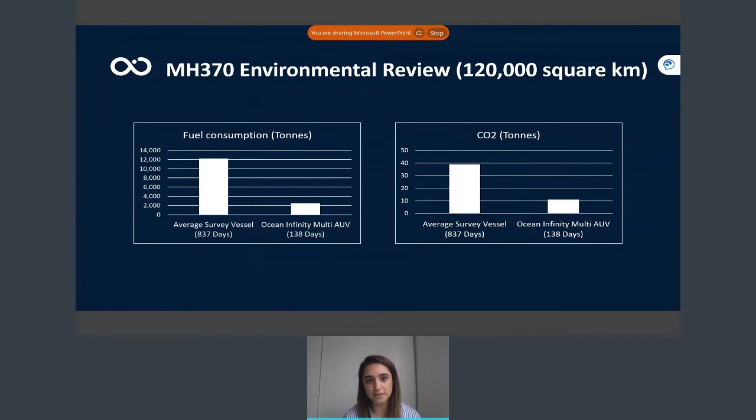For the HSEs as well, comparing 138 days to 837 days, there's a lot of difference.

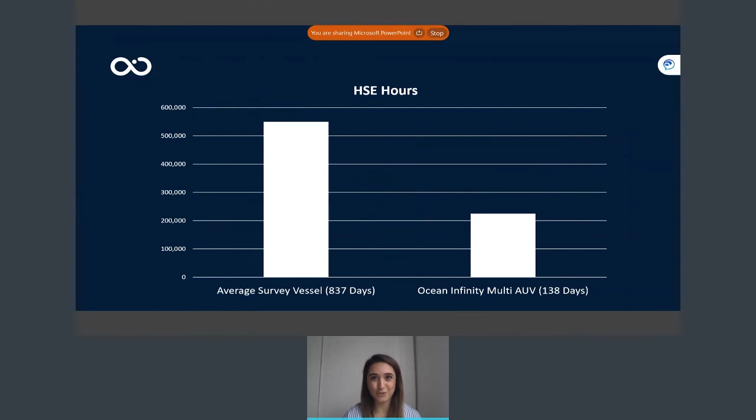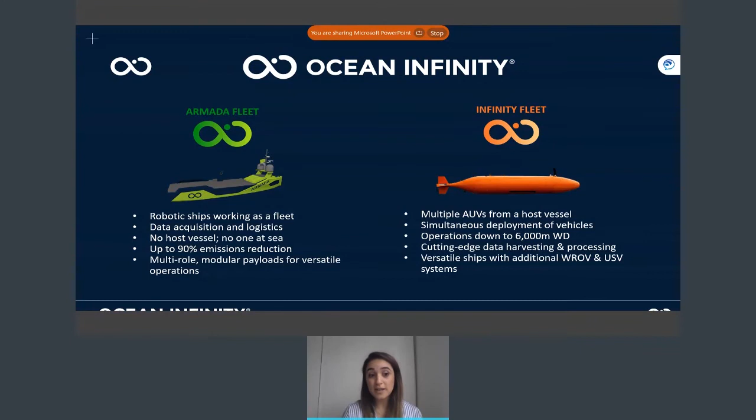A new development is Armada. We talked about Infinity Fleet, but we are also now building a new business unit. We are building new boats, and our aim is to have no host vessel and no one at sea, up to 90% emission reduction. This new fleet will be called Armada under the Ocean Infinity brand. We will launch it in February, and they will all be unmanned vessels. They are capable of shallow water and deep water survey, as well as ROV, AUV, UAV payloads. Hopefully, when they're up and running, they will be operating the largest fleet of low-emission, multi-role robotic ships.

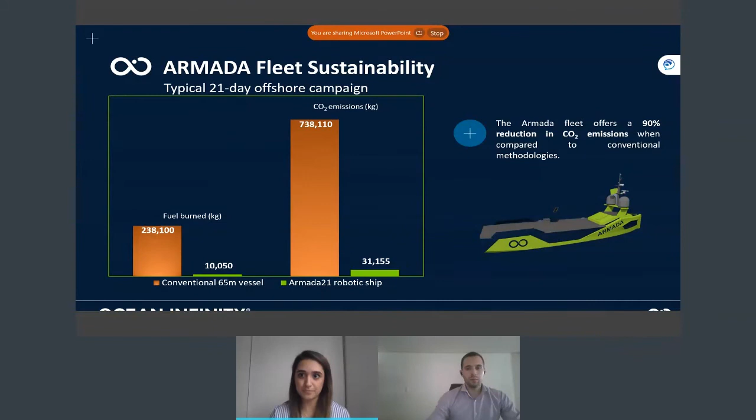It will be similar to this. Of course, they are still building up, so it might look different, but this is the current images. The sustainability part is very important, because in a typical 21-day offshore campaign, you can see the difference between the Armada 21-meter robotic ship on the right and a conventional 65-meter vessel in terms of emissions. The advantages will be that we can transport them anywhere in the world, even by air. They will have ultra-speed data collection, zero people at sea, and improved safety. There will be a lot of quality data gathered faster and more efficiently.

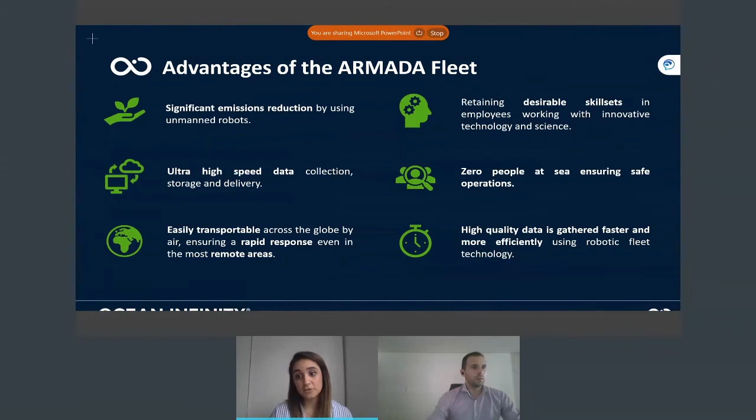With Armada boats, we are hoping to answer these sectors' questions.